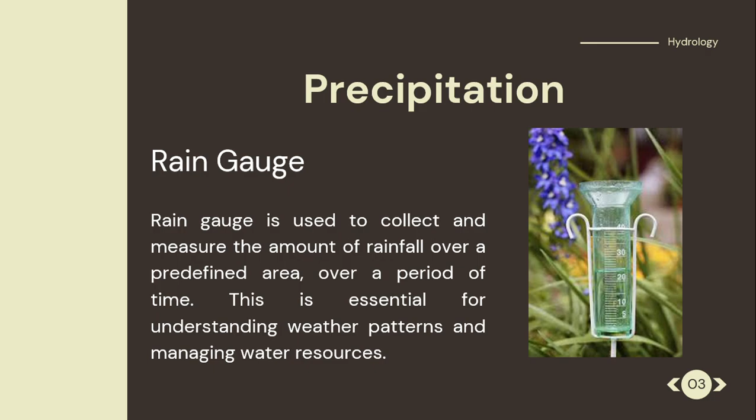Next is the tipping bucket rain gauge. A tipping bucket rain gauge consists of a funnel that directs rainwater into a small-sized bucket with a tiny hole in the bottom. So dito, kapag napuno yung bucket to a certain point, it tips over emptying the water, and that signals na yung fixed amount ng precipitation ay na-collect na. So next slide. Sunod naman is yung evaporation pan.

An evaporation pan is a device used to measure the rate of evaporation of water from a specific surface area over a certain period. It consists of a shallow flat-bottom pan made of non-porous material such as metal or plastic, typically painted white to minimize heat absorption, and is placed in an open area away from obstruction. Basically, nilalagay yung pan in a level wooden base and enclosed siya ng chain link fence.

Then the rate of evaporation is determined daily by recording the depth of water. So initially, yung quantity ng water dito is sineset siya ng 2 inches. Then at the end of the day, nire-refill yung water dito, and yung amount ng water na kinailangan para ma-fill ulit yung pan into 2 inches is the rate of evaporation.

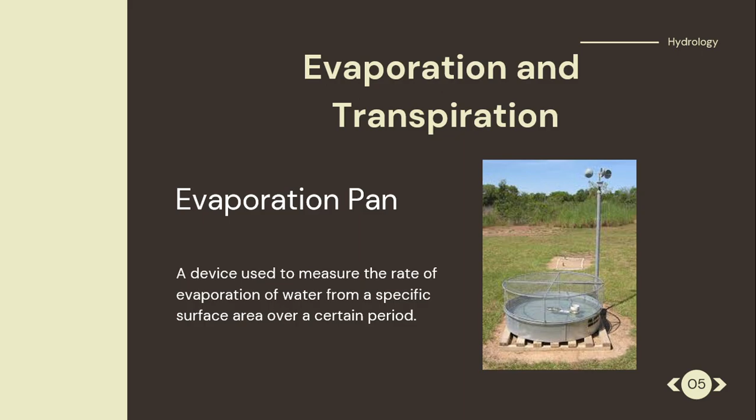So next, related to this instrument is the lysimeter. Evapotranspiration measurements are often made using lysimeters. It is a device used to measure the movement of water through soil, particularly the process of percolation or drainage. So basically, yung lysimeter ay ginagamit upang ma-measure yung amount ng water na nagpe-percolate or tumatagos sa soil. So yun.

So next is wind, temperature and humidity. We will focus on the devices that we use to measure each of them.

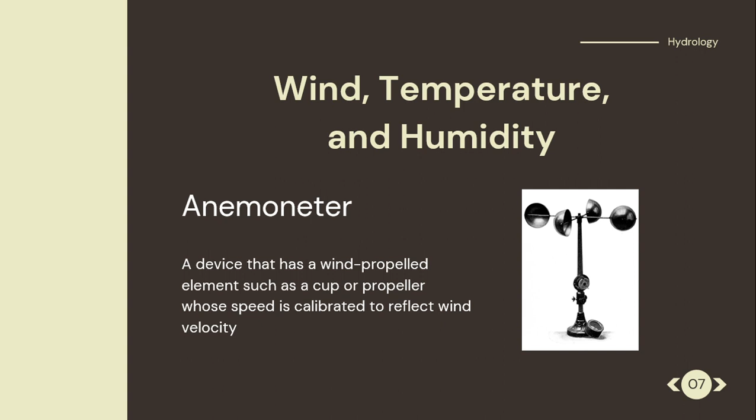First, wind. Using an anemometer, we can measure the wind. An anemometer is a device that has a wind-propelled element, such as a cup or propeller, whose speed is calibrated to reflect wind velocity.

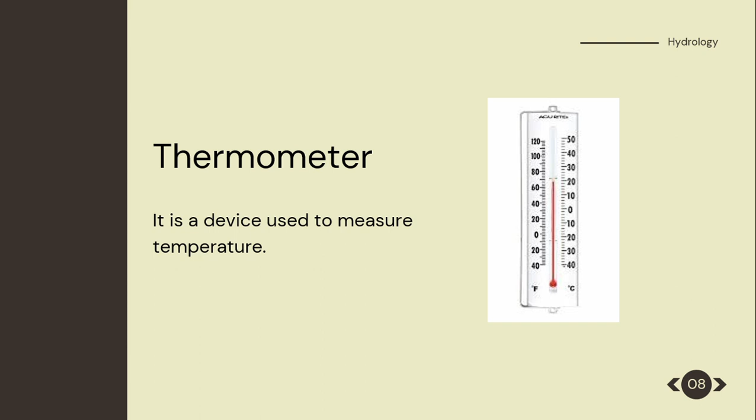Next is thermometer. Using a thermometer, we can measure the temperature.

Psychrometer. It consists of two thermometers, one called the wet bulb and the other the dry bulb. Using a psychrometer, we can measure humidity.

Open channel flow measurements of open channel or natural and created flow are made using standard measuring devices such as flumes and weirs. They are also made by calibrating special control sections along rivers and streams, such that measurement of depth of flow can be related to discharge.

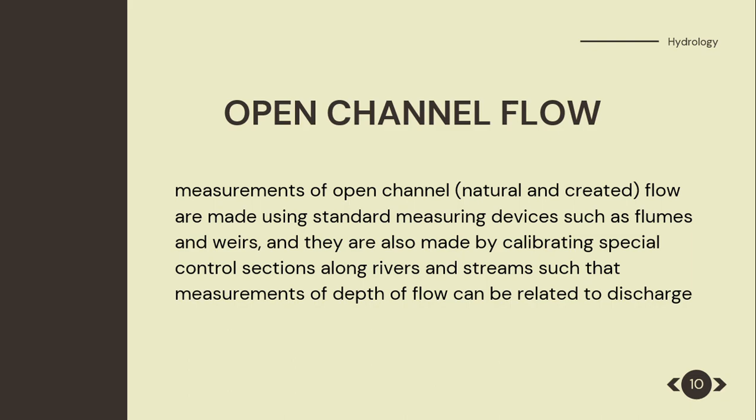Weirs are a common water measuring device. There are three types of weirs. First is the rectangular weir. A rectangular weir has a notch of a simple rectangular shape.

Second is the Cippoletti weir, which is much like a rectangular weir except for the sloped sides of the notch. Lastly is the V-notch weir, which has a triangular notch customarily measuring 60 or 90 degrees.

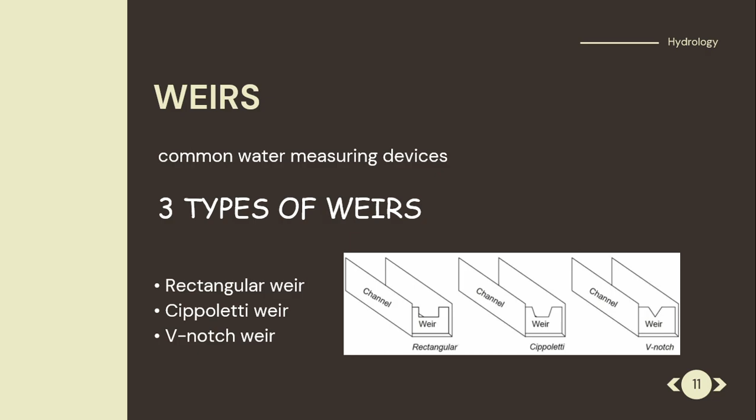Parshall flumes. The Parshall flume was developed by the late Ralph L. Parshall. It is a particular form of venturi flume, an especially shaped open channel flow section that can be installed in a channel section.

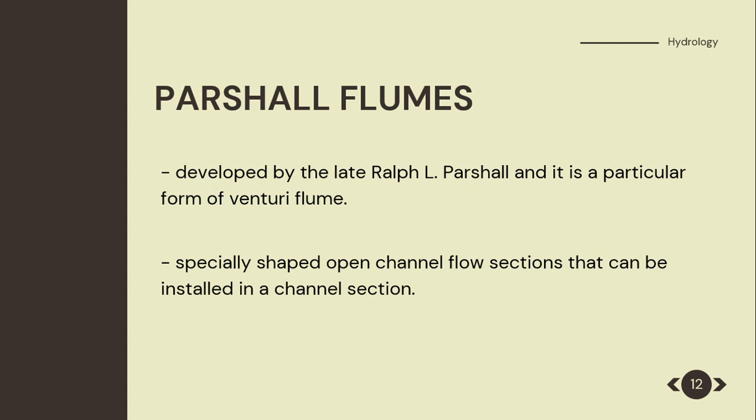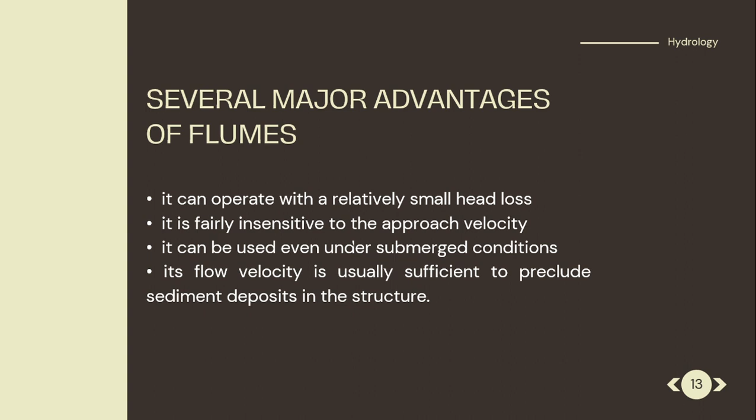There are several major advantages of the flume. First, it can operate with a relatively small head loss. Second, it is fairly insensitive to the approach velocity. Third, it can be used even under submerged conditions. Lastly, its flow velocity is usually sufficient to preclude sediment deposit in the structure.

Control sections: where the installation of a weir, flume, or some other flow measuring device is impractical, it is sometimes possible to develop an operating curve at some location along a stream by taking measurements of depth, cross-sectional area, and velocity, and calculating the rate of flow for a particular stage at the location.

For control sections, the velocity meter is similar to an anemometer. It is placed at various positions in the channel and velocity is recorded. By doing this at a number of locations, a velocity profile for a given depth can be developed. From this, an average flow velocity can be computed, and using that and the cross-sectional area, discharge can be calculated as the product of mean velocity and cross-sectional area.

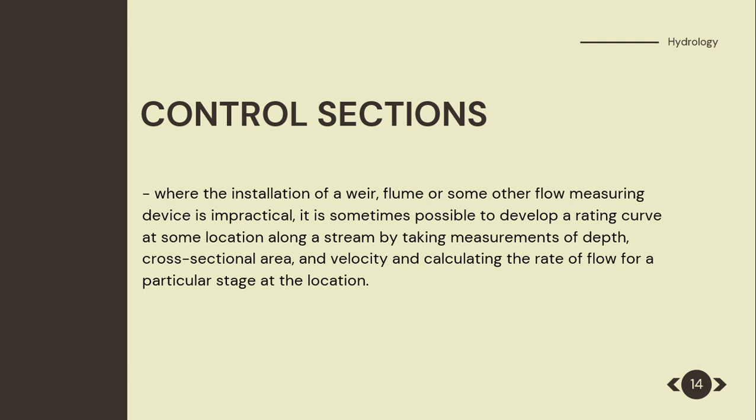Next is the depth or stage instruments. Depth is measured using a float and cable arrangement in a stilling well, or a bubbler gauge. A bubbler type installation makes use of dry air or nitrogen as a fluid for bubbling through an orifice into a channel bed. As the depth of flow changes, the change in head above the bubbler orifice causes a corresponding pressure change. This results in fluid level changes in the manometer connected to the gas supply, which in turn is used to reflect stage variation over time.

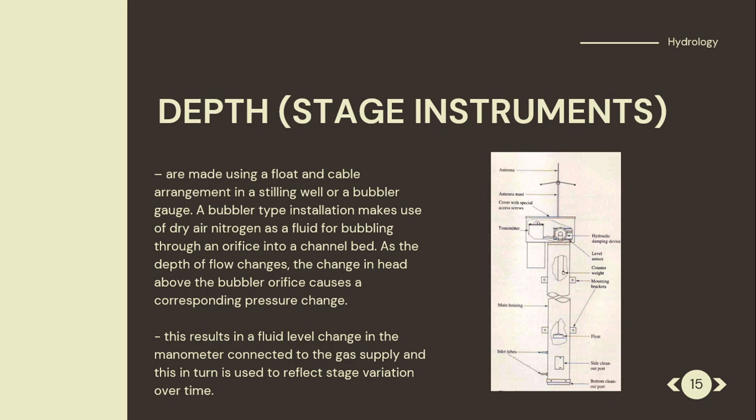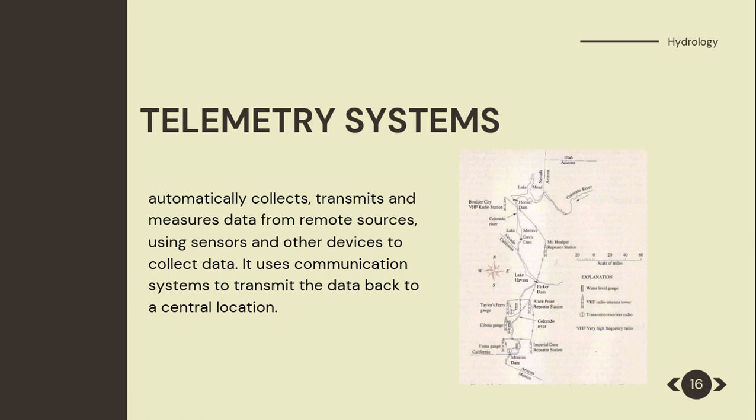For telemetry systems: a telemetry system automatically gathers, sends, and evaluates information from distant sources, utilizing sensors and additional tools to gather information. It makes use of communication systems to send the information back to a focal point.